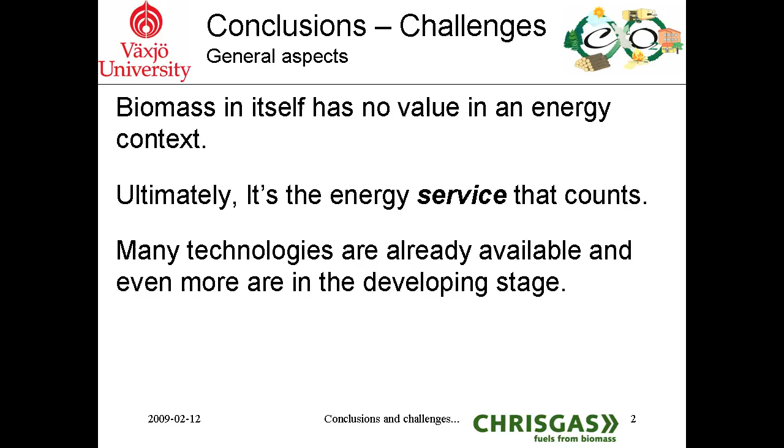In spite of these technologies that already are available and are upcoming, there are a number of common misunderstandings that act as a hindrance for the introduction of renewable energy and bioenergy. Let's have a look at these misunderstandings.

The first very common misunderstanding is that biomass for energy has to be virgin, it has to be fresh from the fields, but this is not true, as we will see.

A second common misunderstanding is that biomass for energy must be agricultural, so it must be grown on cropland, which is basically not true.

A third misunderstanding comes from the second one, and says that biomass for energy always competes with food. Now, this is not true, as we will soon see.

And as a consequence, biomass for energy would also compete with fiber for the production of clothes and cloth that we need in everyday life.

Some people would argue that biomass for energy competes with the wood industry, the timber industry, the paper and pulp industry. But this is not true.

Sometimes you will hear people say that the transport energy for biofuels makes the total energy balance negative, so that the biofuel transports are extremely energy inefficient. This can be discussed.

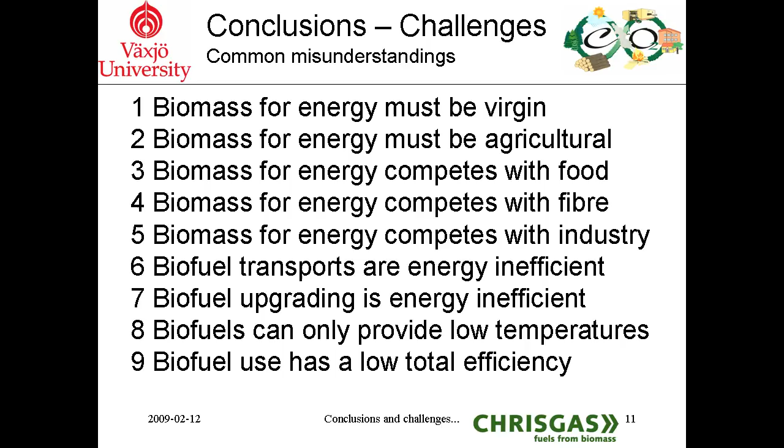The conclusion of the eight first misunderstandings becomes that biofuel use has a very low total efficiency. Now, this is open for discussion.

And the final conclusion out of these misunderstandings is obviously that bioenergy is uneconomical, that it is naive, and that it cannot be used in industrial society. This is not true. It's a false conclusion.

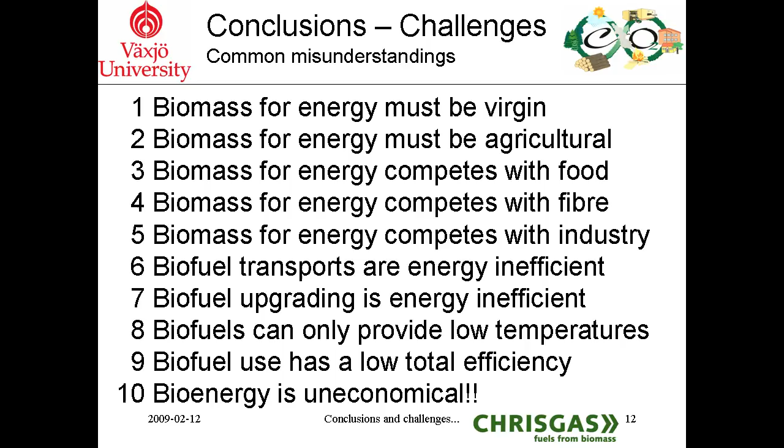So let's go through these misunderstandings one by one. First, must biomass for energy be virgin? No, it doesn't have to be virgin.

The main part of the biomass actually used for energy was, before it was used for energy, regarded as waste fractions. Obviously, this is not true for ethanol produced from maize, nor for the use of corn as a fuel, but such abuse of food for energy is quite uncommon, and has been seriously criticized from the international community and the United Nations.

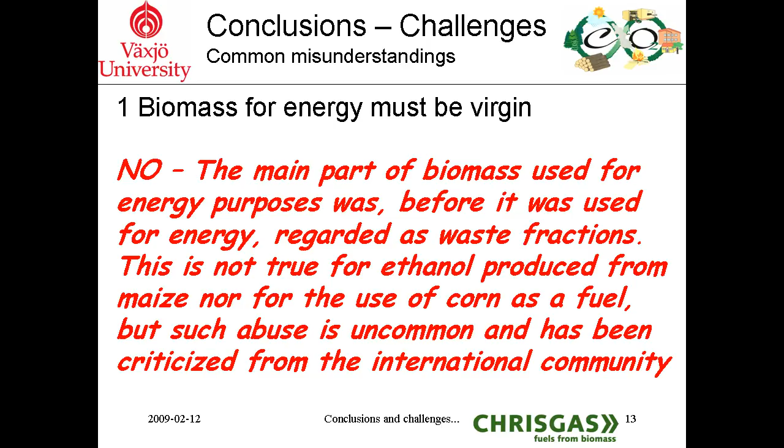So, biomass does not have to be virgin when used for energy. It can be waste fractions.

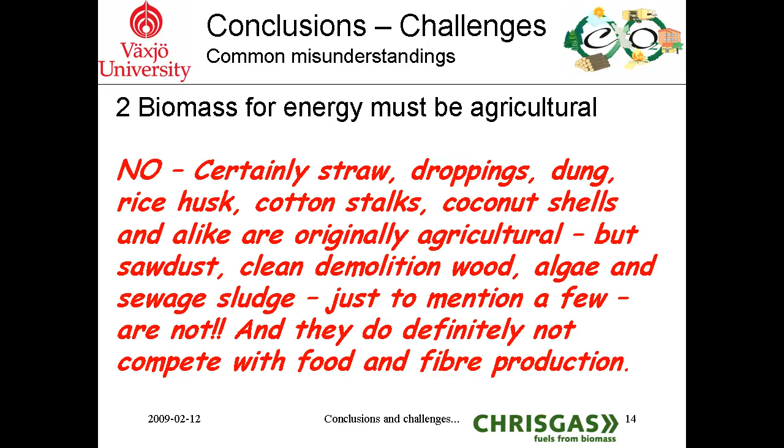Does biomass for energy have to come from cropland and be agricultural to its origin? No, it doesn't. Certainly, some fractions such as straw, droppings, dung, rice husk, cotton stalks, coconut shells or alike are originally agricultural. But sawdust, clean demolition wood, algae or sewage sludge, just to mention a few, are not agricultural. And they do definitely not compete with the production of food and fiber from agriculture.

Will the production of biomass for energy always compete with the production of food? No. Cattle droppings or shavings from wood manufacturing does not compete with food production, just to mention two. Of course, some crops, like straw, may find use as a green fertilizer in the agricultural sector, and the system as a whole must always be evaluated from case to case.

But there is no general conflict between the production of food and the production of biofuels. Abuses, such as the use of maize for ethanol production, must of course always be avoided.

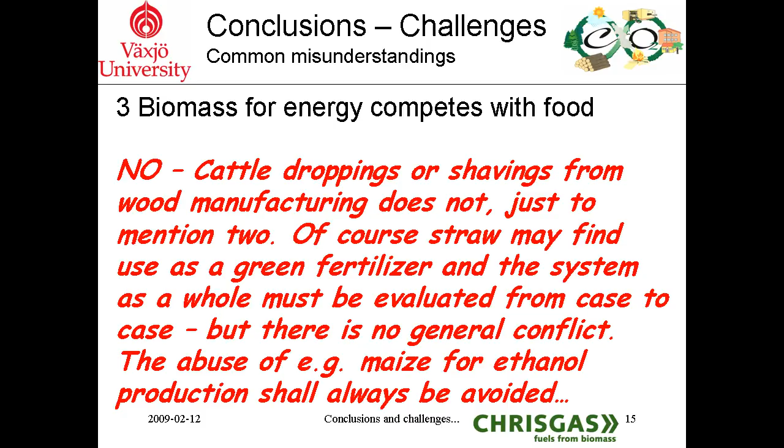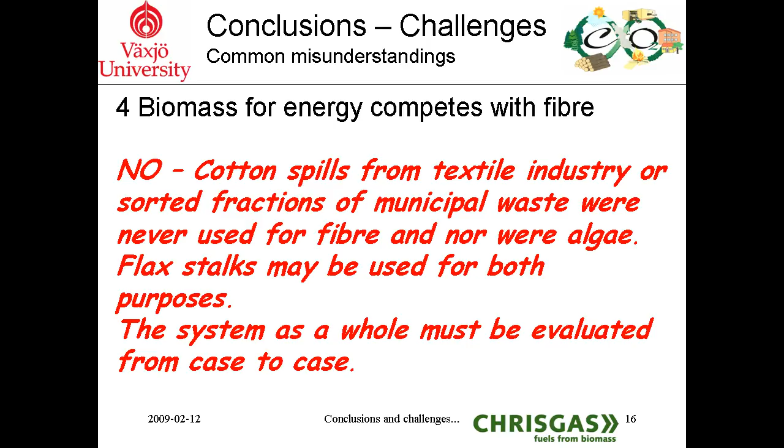Is there a conflict between the production of biomass for energy and the production of biomass for fiber? No, there is not. Cotton spills from textile industry or sorted fractions of municipal waste were never used for fiber, nor were algae. Flax stalks may of course be used for both purposes, but the system as a whole must be evaluated from case to case.

Does biomass for energy compete with the resource base for wood-based industry, such as paper and pulp industry and timber industry? No, the shavings from wood manufacturing, or the sawdust produced in carpentry, may certainly be used for fiberboard, but there is no general conflict. Again, the situation has to be evaluated from case to case and from region to region. No serious energy engineer would ever advocate the use of whole virgin trees only for energy purposes, instead of using the tree for timber, for pulp and paper, and for energy in combination.

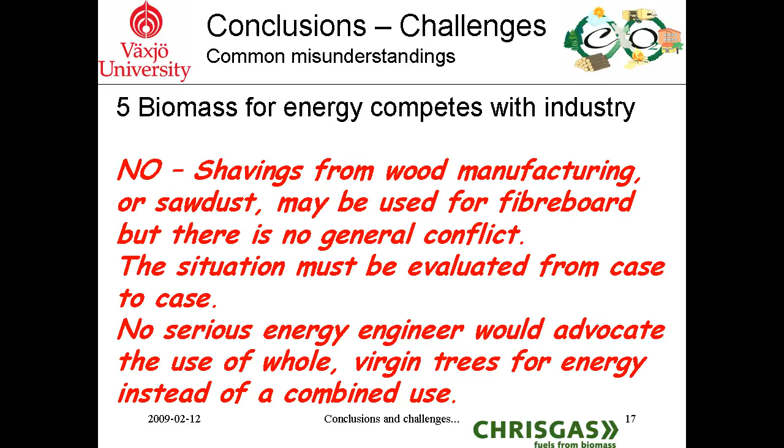Is the need of transport energy for biofuels so large as to render them energy inefficient? Well, it is true that biofuels do require a larger transport energy relative to their energy content than fossil fuels do. Thus, the production plants, the supply chain, and the technology used must be planned, designed, and localized accordingly. No serious energy engineer would ever advocate biofuel-fired plants the same size as those aimed for fossil fuels, and that is because of the transport energy.

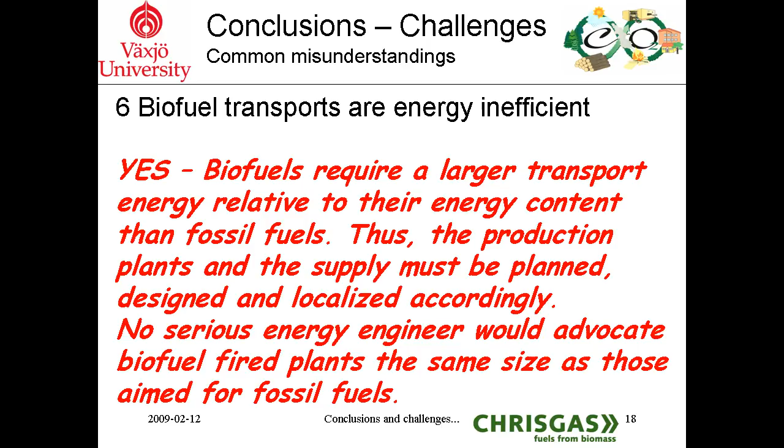Is the energy input needed to upgrade the biofuels to a higher quality so large as to render the total energy balance of the biofuel negative? No, it's not. The energy needed for pelletizing, all included, amounts to about 10 to 15% of the final energy in the pellet. The losses in thermal gasification amount to about up to 10 to 15%, but less in large-scale plants, of the total energy in the gas produced. But of course, upgrading should be avoided and used only when necessary or when it adds value to the final product, sufficient added value to pay for the energy input.

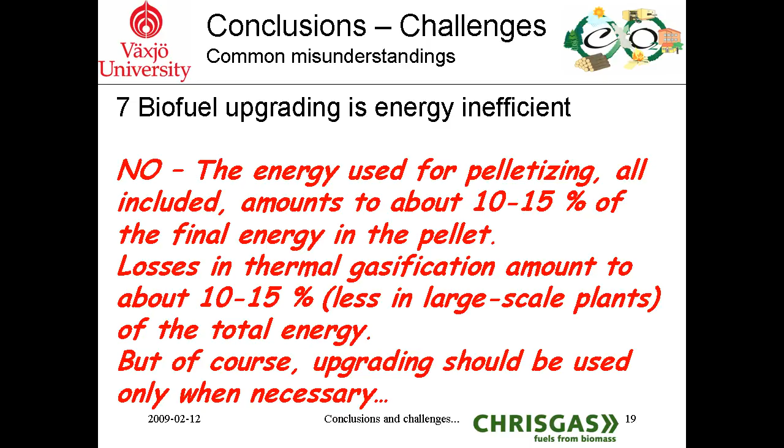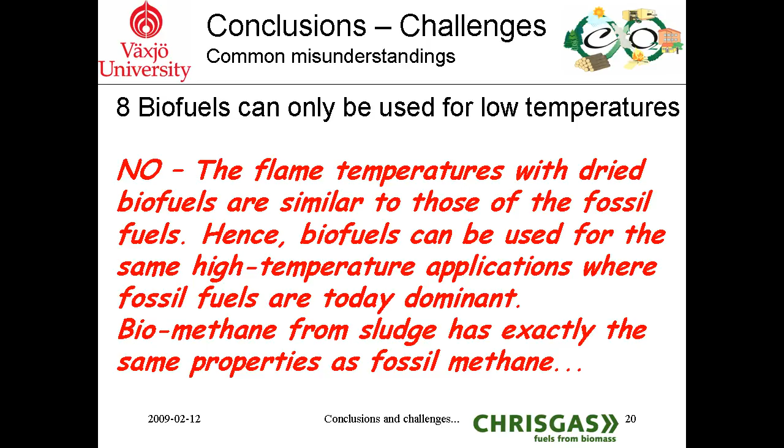You will sometimes hear people say that biofuels can only be used for low temperature processes, 700 degrees or lower. Now, this is not true. The flame temperatures with dried biofuels are similar to those of the fossil fuels, like 1800 to 1900 degrees Celsius. Hence, biofuels can be used for the same high temperature applications where fossil fuels are today dominant. We need only mention glass manufacturing, steel manufacturing, or the burning of building brick as examples. The important thing to remember is that, for example, biomethane from sewage sludge has exactly the same properties as fossil methane as found in the so-called natural gas.

Those people who are subject to the 8 aforementioned misunderstandings will usually arrive at the conclusion that the biofuel use has a low total efficiency. Now, this is not true. But, of course, if biofuels are input into a system solution which is adopted and designed for fossil fuels, and where care is not taken about the special properties of the biofuels, then the total efficiency becomes low. But the scale, the system layout, and the technology chosen are the factors to determine the total efficiency in the system. So, actually, system efficiency is a question of engineering skills, not of the fuel as such.

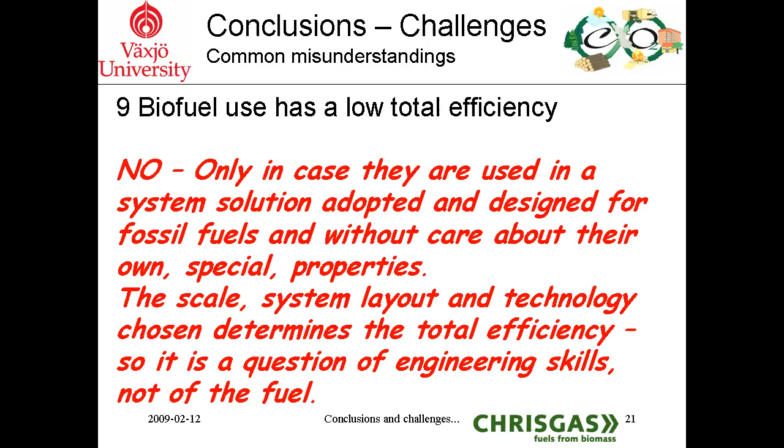Another false conclusion based on the previously mentioned misunderstandings is then that bioenergy is uneconomical and not economically feasible. But this is not true, because bioenergy use may help to solve the local waste handling problems. It will create local long-term jobs, and it might provide new sources of income for agricultural and forest industry sectors, and in agricultural and forested areas.

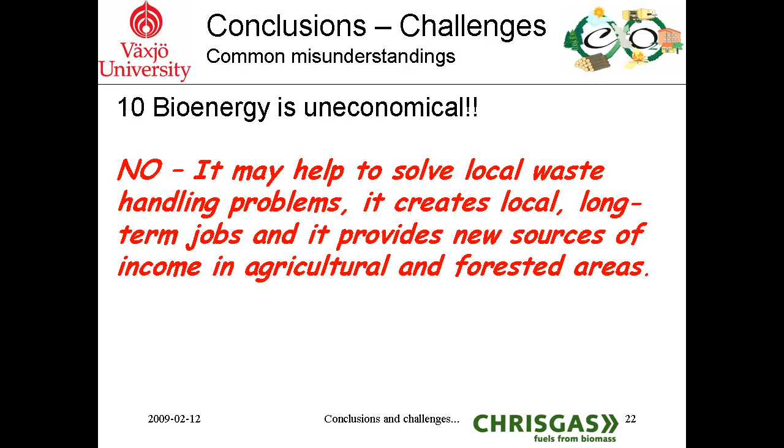So then, disregarding all the misunderstandings that we've just mentioned, is bioenergy, and indeed renewable energy as a whole, naive for industrialized nations? Or can it only be used in agricultural nations and more primitive economies? No. Let's look at the Swedish experience as outlined in the diagram in this slide. You will see how the share of renewable energy at the bottom of the diagram has increased steadily for 40 years, ever since the 1970s, and is today a major source of energy in the Swedish energy system, second only to oil and oil products that are mainly used for transport.

You will notice that the renewable part of the energy in the diagram is split around 1990, where there's a change of color shade. This is due to a change in the formal way of reporting the statistics. So the statistics are not exactly the same after 1990 and before 1990, but you will anyway see how the tendency remains.

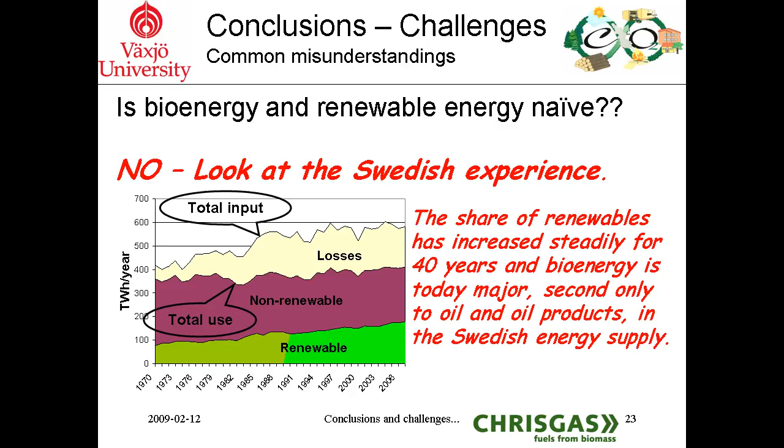The diagram on the previous slide indicated how the introduction of condensing power production to replace the direct use of non-renewable oil for heating purposes led to a lowering of the total efficiency in the system. This was because the introduction of new electricity production was not optimized with respect to customer needs. When you plan an energy system, or major changes in the energy supply system of a society, your estimates, judgments, and recommendations must always be based on the end user needs of services.

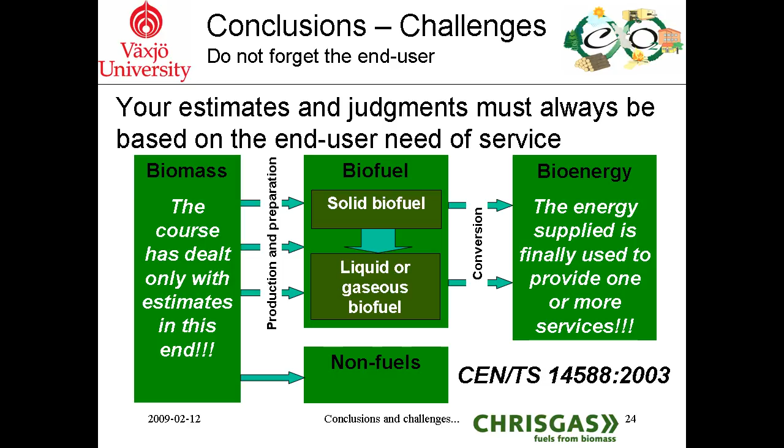Let's now look at a few very simple examples of how different system solutions can be set up to provide cooling and electricity for a society, and what possibilities exist for these system solutions to also provide heat for tap water or for comfort heating.

We'll start by looking at one of the most common large-scale solutions found worldwide - that is large scale, larger units than about 500 megawatt thermal power. These would be condensing power stations, using typically, in the modern case, a combined cycle, that is, a gas turbine and a steam turbine in combination. Such a modern power station will have a total electricity efficiency of about 45, maybe up to 50%, and the remaining part of the fuel energy input will be lost. In this Sankey diagram, we assume 45% electricity efficiency and 55% losses.

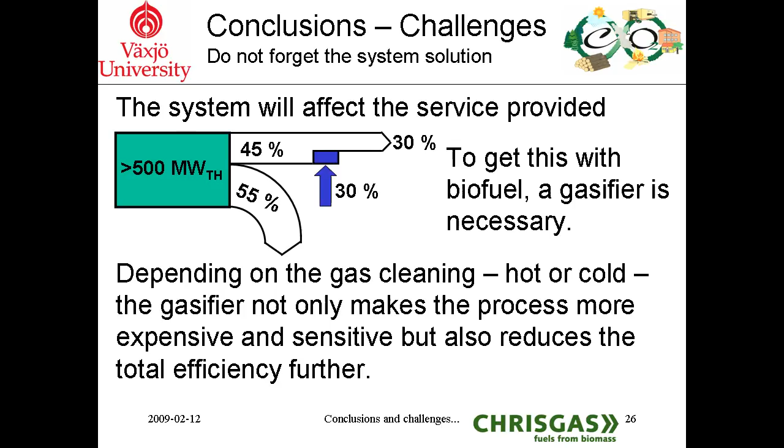Going to a slightly simpler system solution with only a steam turbine and no gas turbine, the total electricity efficiency will be reduced to about 35 to 40%. Introducing a compressor cooler to provide comfort cooling, we would then arrive at a final total service to the end user equivalent of 25% of the fuel input as electricity and about 30% of the fuel input provided as cooling power.

This technology can be combined with solid biofuels. You do not need a gasifier to make this kind of plant. But again, to keep up the total efficiency, the scale has to be around 250 to 500 megawatt thermal input. So for biofuels, it would mean that the transport work becomes quite large.

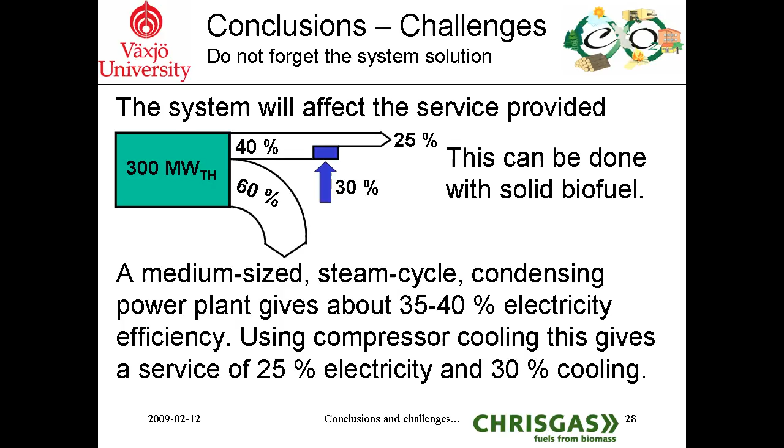Going further down the scale, into units about 100 up to a few hundred megawatt thermal input, we will find technologies more suitable for biofuels. To keep up the total efficiency in the system, you would prefer to use a combined heating and power station, where you make use of the heat produced. In such a unit, you would arrive at an electricity efficiency of about 35 up to 40%.

When the heat demand is low, you would instead produce cooling using absorption cooling production. That would ultimately give a total final service to the end users of about 35% of the fuel input delivered as electricity and about 30% of the total fuel input delivered as cooling power. You will notice that this is comparable to the large-scale unit we had from the beginning.

Even further down the scale, the electricity efficiency will decrease because of scale effects in the steam turbines. At about 75 megawatt thermal power, we would arrive at 30 to 35% electricity efficiency. This is comparable to what you get from a nuclear power station.

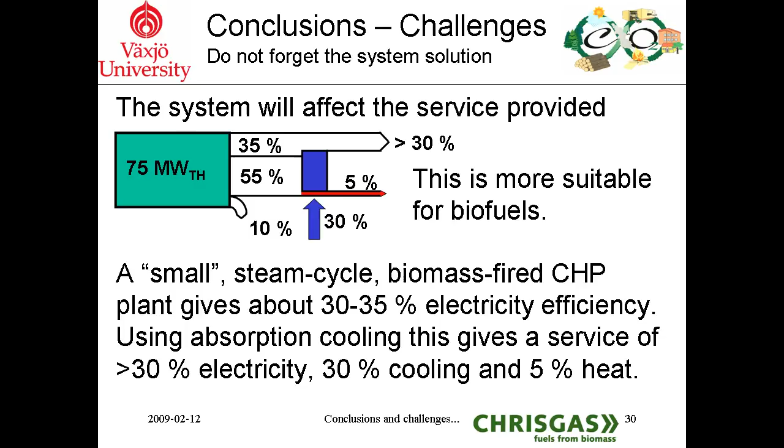Comparing the four different systems in one slide, you will notice that the two top ones, the larger scales, more than 250 megawatt thermal approximately, typically fired with fossil fuels, are fairly inflexible. None of them can deliver any heat, but they can only deliver electricity onto the grid, and local compressor cooling machines are then used to provide the cooling needed.

The two bottom ones, which are both combined heat and power production units, smaller scales up to 250 megawatt thermal, will have a larger flexibility. They will be able to produce cooling, electricity and heat in varying proportions. So they will be more flexible, they will have a higher total efficiency, but they will still deliver energy services in roughly the same proportions as the two major power stations at the top.

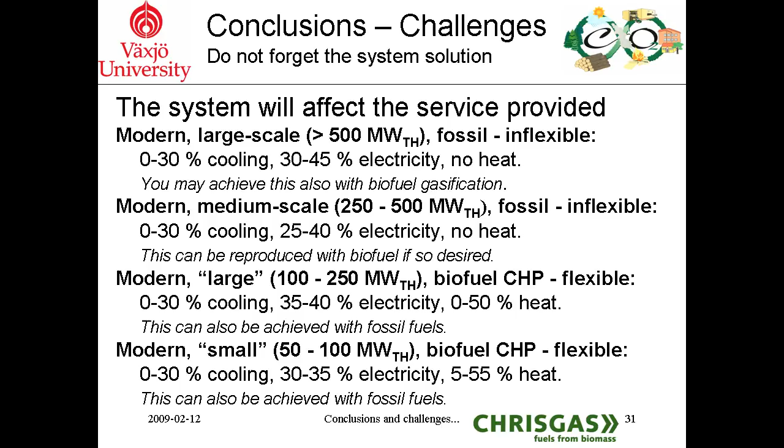By this, we have now arrived at the end of the course. Now it's up to you. How can you use what you learned in this course to contribute to spreading the message and to counteract the common misconceptions and misunderstandings about bioenergy and renewable energy in your region?

The aim of this course was to make you appreciate the real potential of renewable energy, based not only on bioenergy resources, but on the renewable resources best suited in your own region. You've learned a little bit of how to assess the resources, but you've also learned to take into account the whole system.

However, we have not covered the different technologies for electricity production, cooling production, or heat production in any detail in this course. But hopefully you have learned a little bit to help spread the message and to contribute to a larger proportion of renewable energy in the world's energy supply system and in the energy supply system in your own country and region.